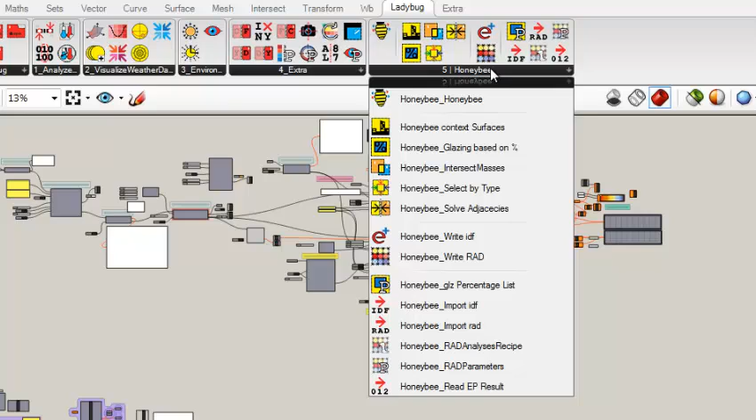Honeybee is a plugin for energy and daylighting simulation, like advanced simulations using Energy Plus and Radiance. It has multiple components, similar to Ladybug, which is the main classes, and then components for preparing the geometry, two components for running the analysis, and some components for reading the result back in visualization.

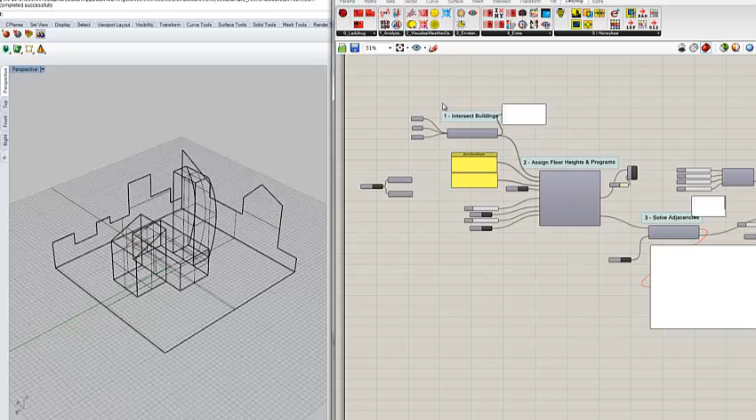I will just walk you through the different steps. The reason I'm capturing this video is that right now few people know about the project. I talk to them and get some feedback, wishes, and comments, and I think now is the time to get more ideas involved.

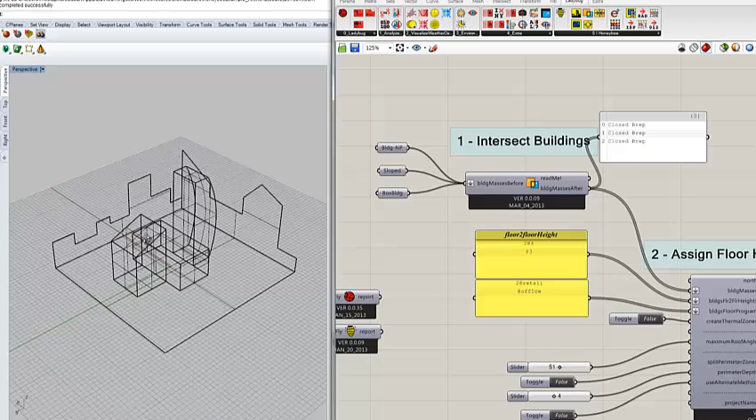Okay, so for this example, I selected three buildings here. This is a non-planar building, the sloped one, and the building box in the center. And then I have the site here, which I will add to the simulations.

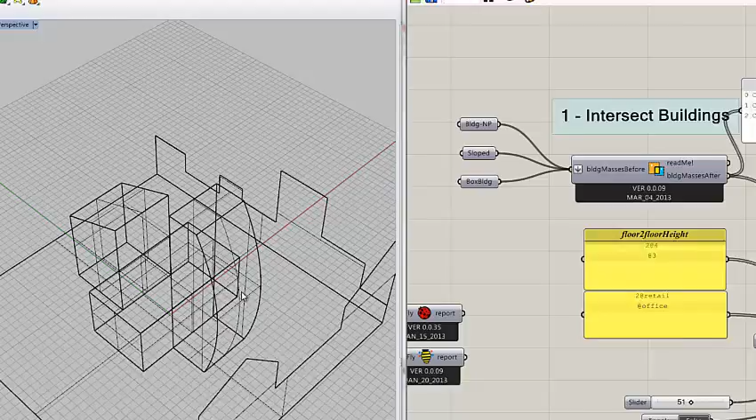I selected one of the buildings to be non-planar to show the abilities of Honeybee in handling non-planar surfaces. I already know it will add to the time of running energy simulation, especially, and a little bit for daylighting, but I think it doesn't matter. I'll just fast forward that part.

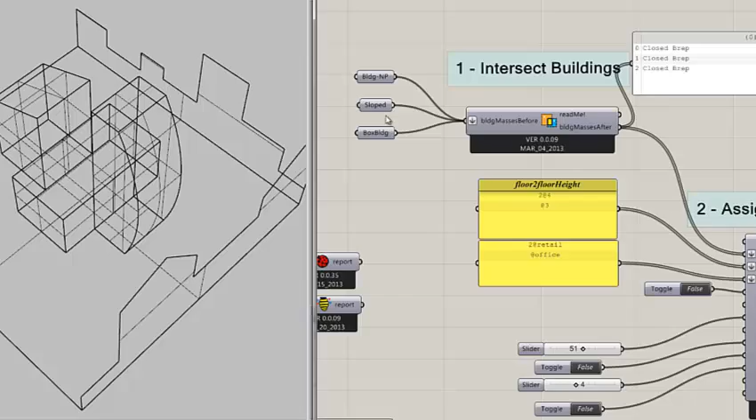So the first step is, you have your buildings, you just connect them to the intersection component, so it intersects the buildings, finds the surfaces which are shared and intersects the buildings based on that.

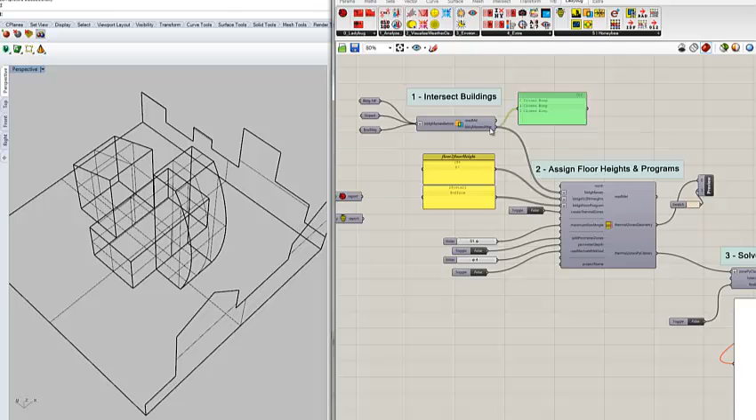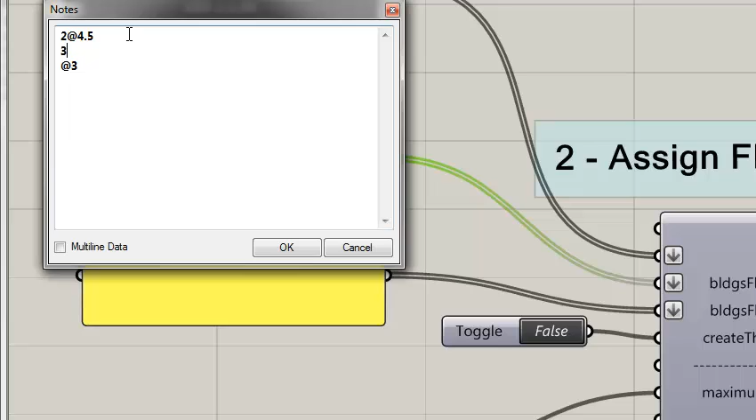Then you use the result of this component here, you start making your floors. So I say the first two floors, for example, are 4.5 and the rest is 3. You can say the next three floors are 6 and the rest is something like 3.5. But let's keep it like this because these buildings are not that tall.

At the same time, with the same language here, you can say the first two floors are retail, rest is office or whatever, and it will assign schedule and construction set.

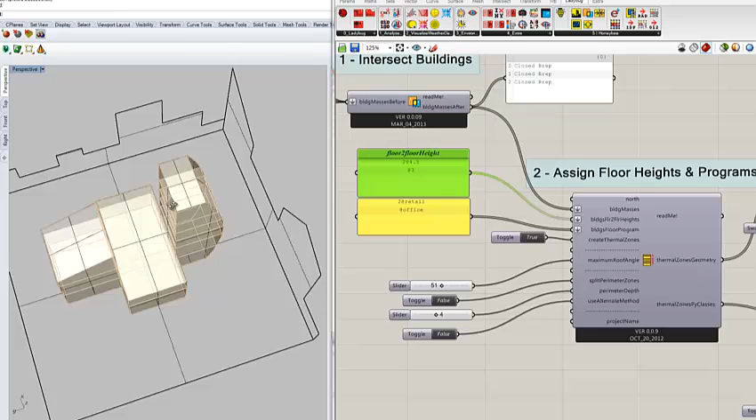And here I have more for splitting zones into perimeter zones. It hasn't been developed fully. It should work for a geometry like this, but I'm not going to try it right now.

So when I get this, there is another component that finds the adjacencies, like which wall is next to which wall. As you see, these are not only geometry afterward - they have attributes, so they have a name, a construction set, and a zone that they're related to.

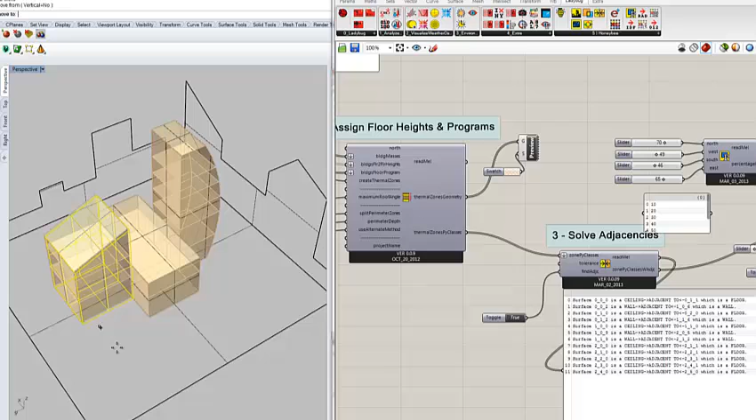And now, as soon as I start moving this here, it will update everything and the adjacency. So okay, so far so good.

So we get this. Now this is the right time to add the openings. I have this component here for now that adds the opening based on the percentage and the orientation. Of course, there will be cases where you have a geometry with everything assigned.

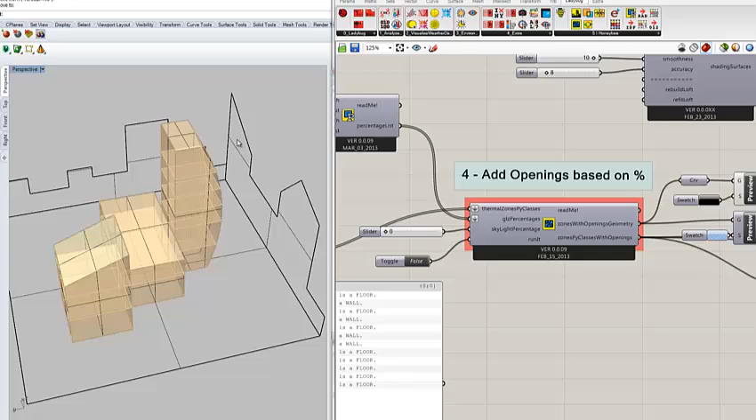There will be another component that you can use to make a thermal zone - or actually I'm using these zones for daylighting simulation too, so maybe I should call it a space, similar to what the OpenStudio team calls their zones. So this is spaces. There will be another component that lets you make the spaces out of a geometry that you designed, in any way that you want.

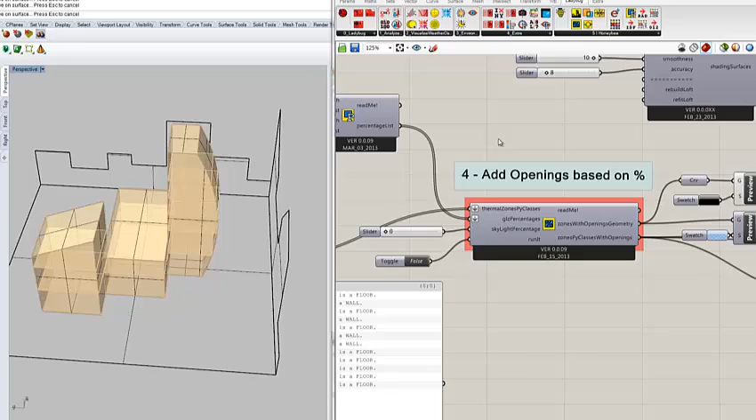So let it run. The reason it takes a little bit is because I have this non-planar surface and I have to use offset curve on surface to find the percentages that I want by guess and check. The other ones are going to be mathematical calculations, so they're pretty fast.

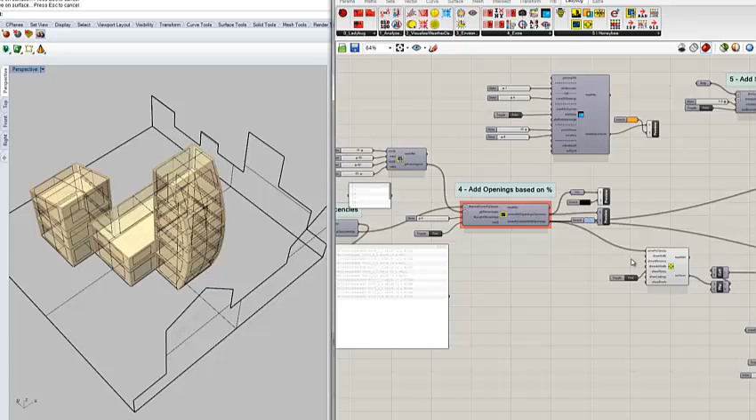Okay, got it. Now it's ready to run actually, but before that, here I'm adding this geometry as a shading, or context. I call it shading because this is the terminology in EnergyPlus - you add them as shading surfaces.

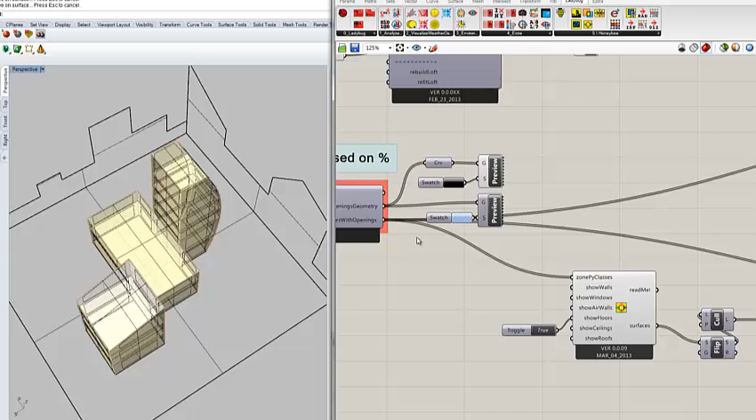So I connect this to here, I connect this one to here, so I have them, and it's ready.

So I just say where the location is, the weather file, and what are the outputs that I want. Working directory, this kind of thing, and then I can just write the IDF and run it.

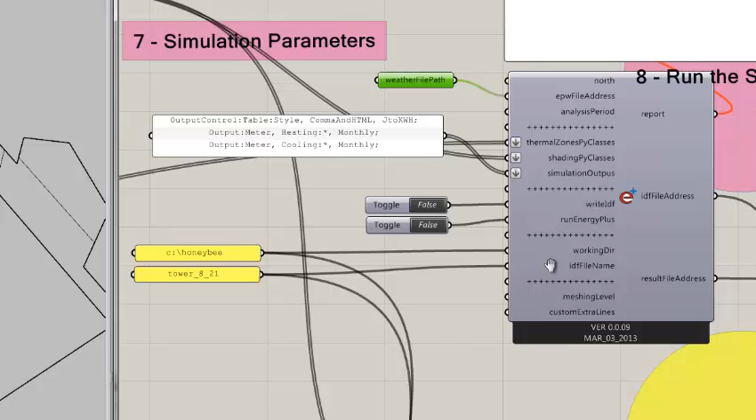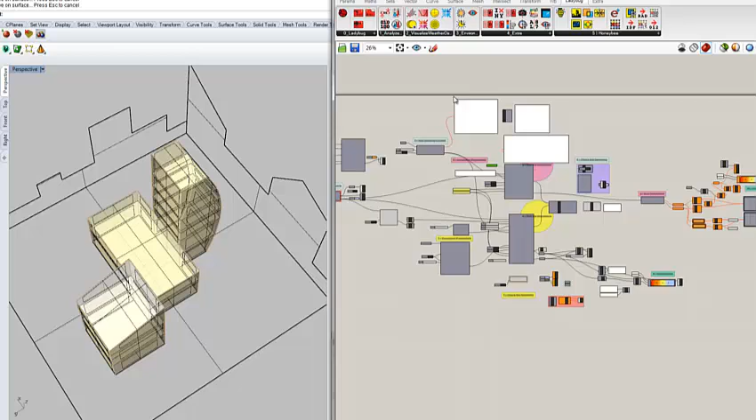But before that, let me talk a little bit about this custom extra line. I add this custom extra line here because EnergyPlus has - I don't know how many - inputs that you can change as variables. If you want to make parameters something like this, or something like what I have for Ladybug, so you can manipulate all that data, then it's going to be something like coming starting from here, ending here, I think.

And if you're not an advanced user, probably you're not going to change many of them. So this part lets you override the classes that you want to override if you're an advanced user and you want to make a change.

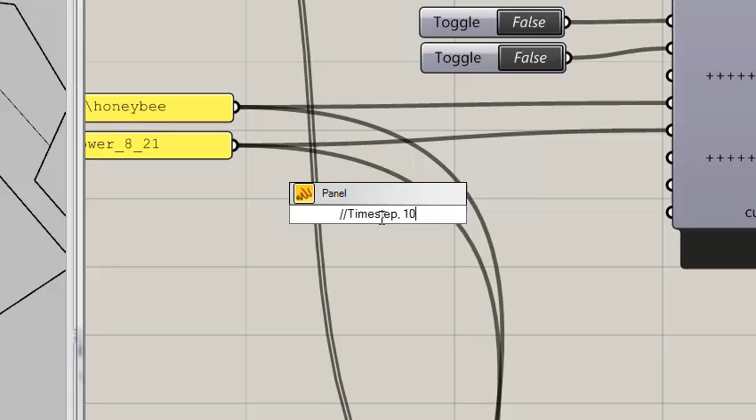A simple example could be the time step of the simulation. So I can write time step and like 10. It is 6 by default, then I connect it here, so the component will understand it and read it. Time step is here as an input, so it overwrites the time step that is already there.

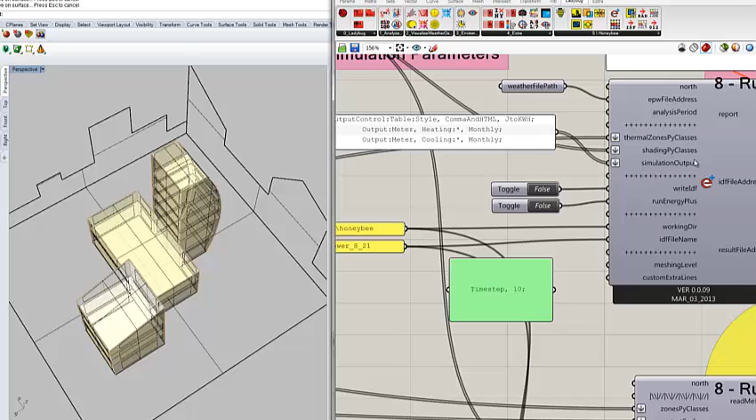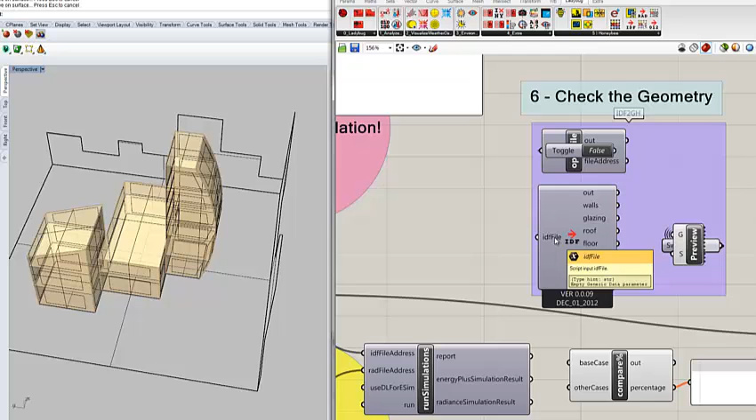So let me write the IDF file. Here you go, done. And before I run it, there is a component here that you can check the geometry. It basically takes the IDF file and visualizes it inside Grasshopper. It could be any IDF file, including the one I just wrote.

Let me turn off the preview. And the floors are here. The reason I'm doing this is before running the simulation, you want to make sure you have the right geometry. You don't want to run it and then be surprised.

I think the process of having a program that goes both ways, like from Rhino to energy simulation tools or daylighting, and from those tools bringing back to Rhino and Grasshopper, is important.

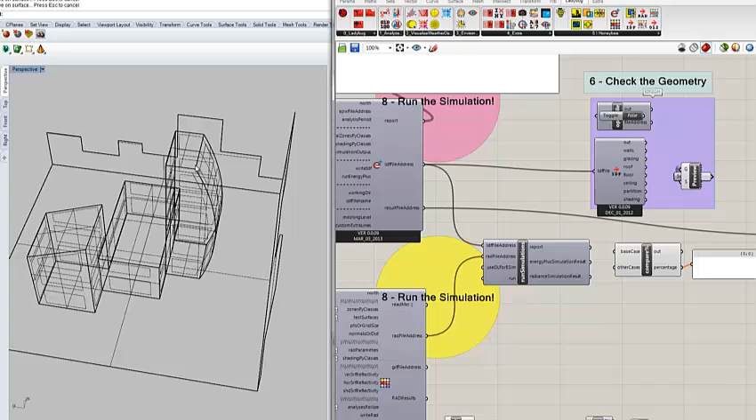Again, it takes a while because you will see the mesh on this surface. Okay, here you go. I connected them to different colors, so they're colored based on the type. The walls are yellowish, yellow-green is roof, and then you have glasses, so you see what's happening.

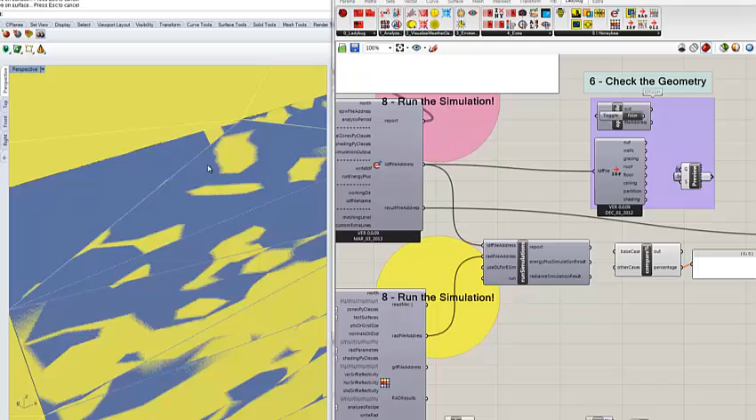These surfaces are all meshed, and if I zoom in, it's actually meshed and offset because all the windows should be a child in EnergyPlus. This is the only surface which is meshed; all the others are clean because there's no need to be meshed. However, it's a closed brep still.

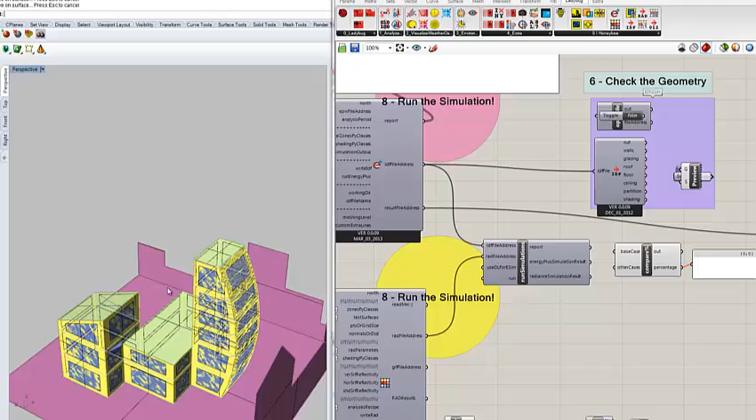So I've worked on different ways of meshing the geometries, cleaning them up, preparing it. I think what I'm doing right now is pretty sophisticated in taking geometries and simplifying them this way. Okay, I have it. It looks good, I can't see a problem with the geometry.

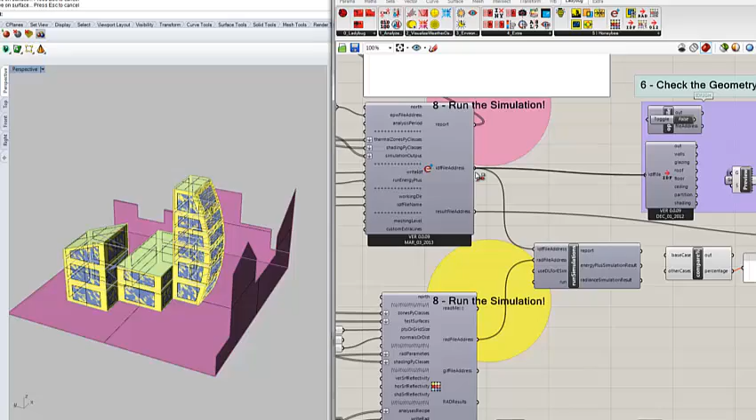Here is something interesting, we should see how long the simulation is going to take. Probably if it takes long, I will just fast forward before I upload the video. So done, run.

As you see, this is EnergyPlus. This is actually a batch file running EnergyPlus, so it's warming up. Oh, and analysis period, I left it empty, so it will run for all the year.

Well, it is slow, but not as slow.

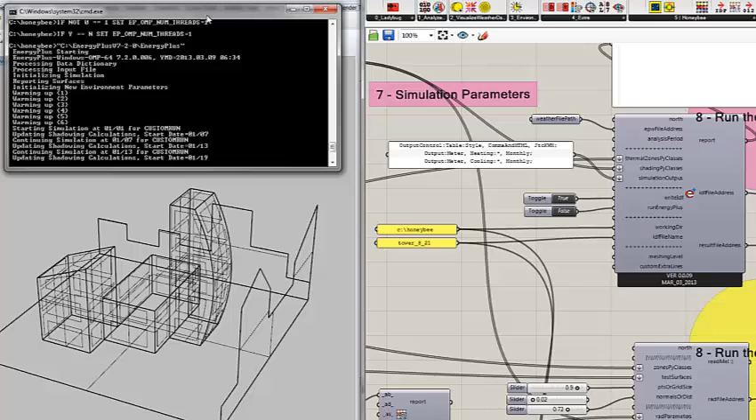I think I will fast forward this part and then show you how you can visualize the result.

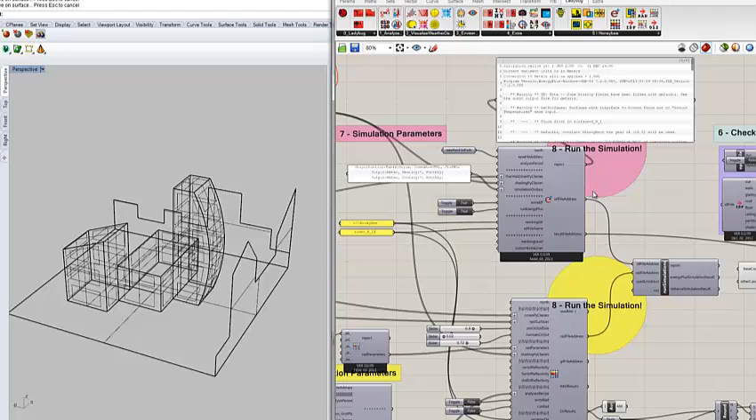Okay, the result is here. The simulation is done. This is the error file or report file, the first file you always want to read. I have 19 warnings, which is okay, and one severe error. Stop that, let's see what the error is.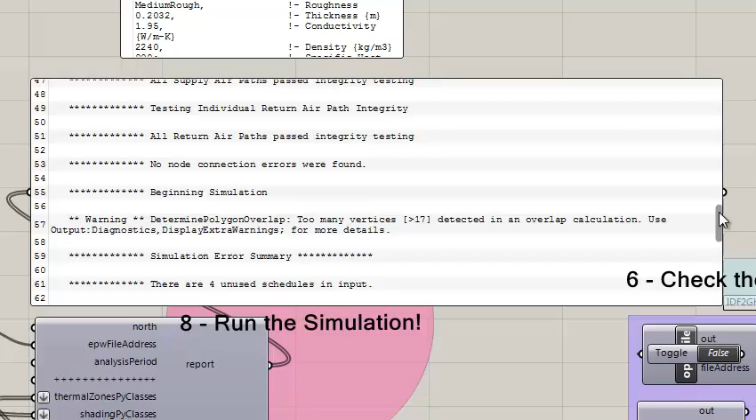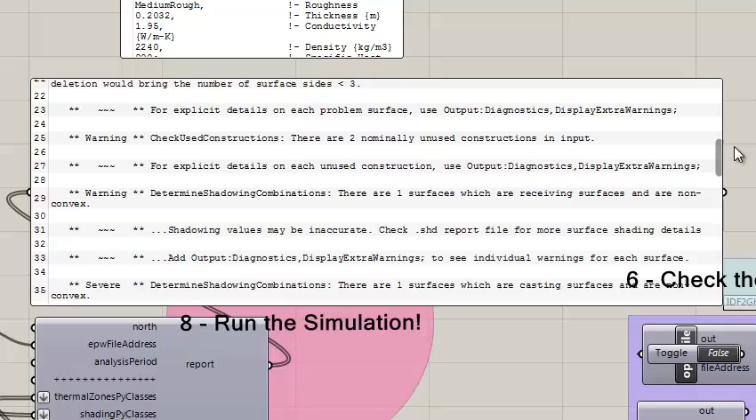It says these vertices are duplicate, they will be removed. Okay, it talks about the shared wall, which is okay because in my library I have only one type of wall, and it's not mirrored, but because the U value is the same, it will just continue the simulation.

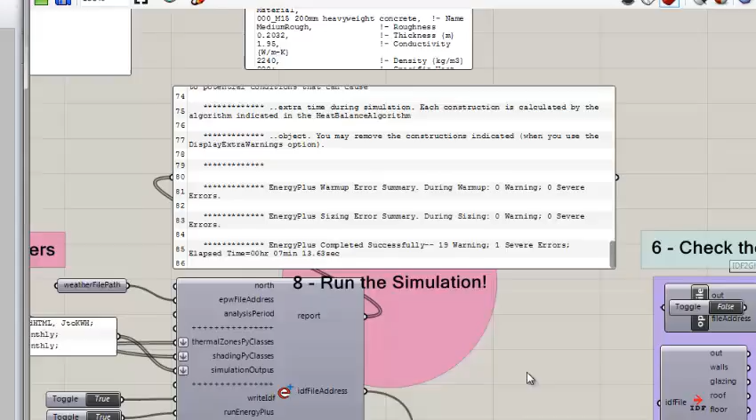If you want, you can add, as you see, you can check more, but for now I just want to show how it works.

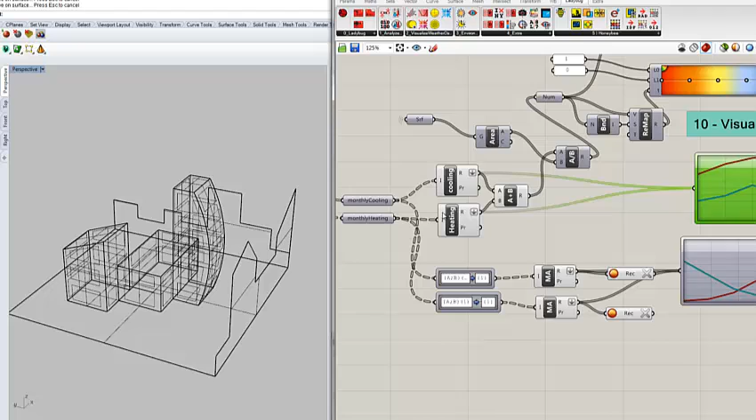So I have a component that reads the results from the address, and as you see, this is the heating load and this is the cooling load of these buildings, all together. And here you can get it for each zone, monthly cooling, monthly heating.

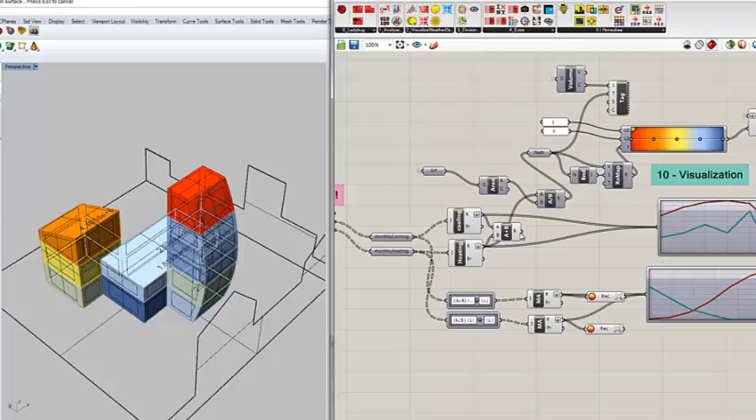So I can use these values and color the zones, right? And then I can see how much each one is going to use. For now I'm doing total per square meter, cooling per square meter, heating per square meter, or just total energy use.

And you see these buildings, because my roof construction is not such a good one, the ones on top are using the most energy. Well, per square meter is a better way to compare.

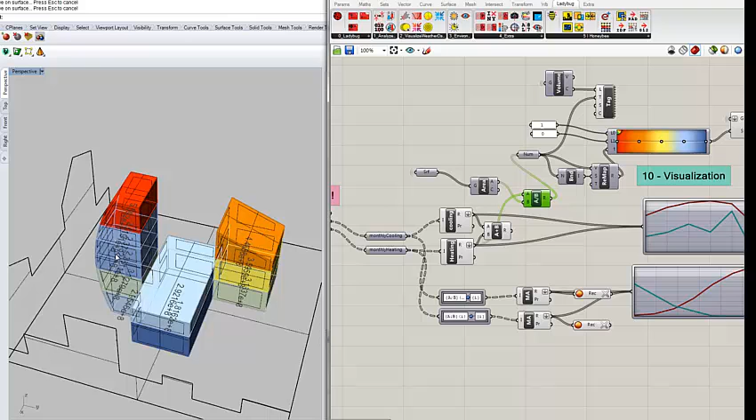In the building, in each building, so here's basically what you can do with energy simulation. You can get the loads.

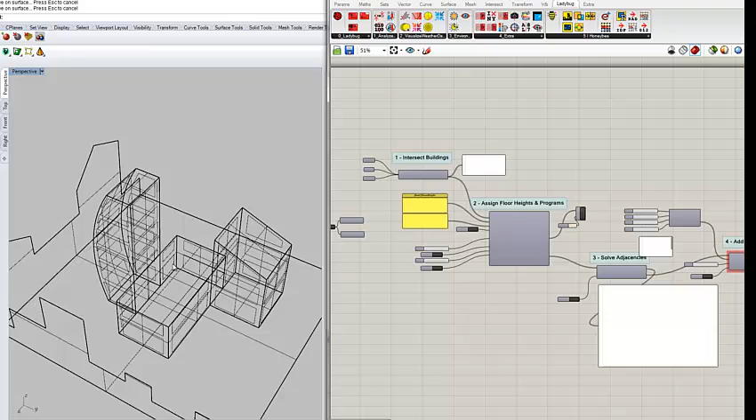Now I can do a fast change, for example, change the percentage of glazing on the west and see the effect—boom, it will redo everything. You can just make something smaller or bigger, but because we have this non-planar thing, I'm not going to do that.

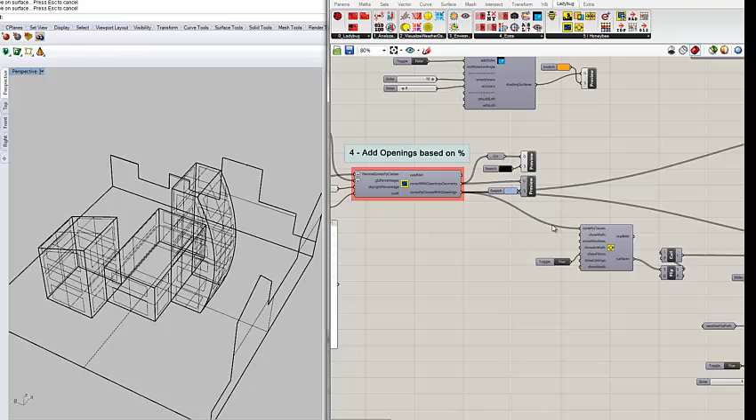It takes a while for running the simulation again. So this is the energy part, but I think an interesting part of Honeybee is you can run daylighting simulation for the exact geometry with no change. So I have this geometry from here. Instead of going that way, I should go this way.

There is a component here for running the daylighting simulation. For daylighting, you get kind of more input right now. Similar to energy simulation, it needs the geometries.

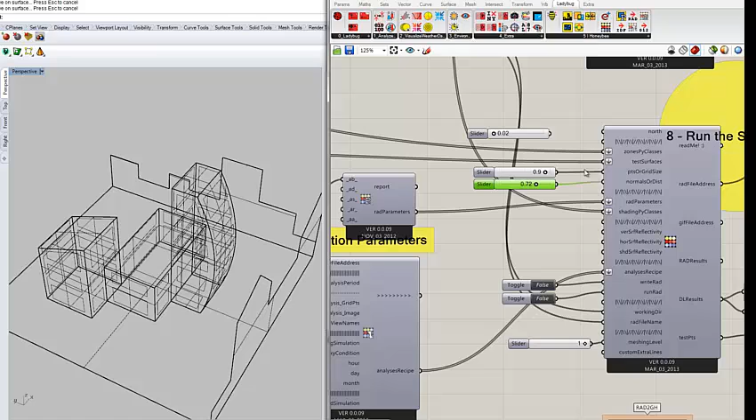It imports some test surfaces, and by test surfaces I mean from test surfaces you generate the grid, the test grid for running the simulation, similar to what you have in Ladybug. But there are small differences here—you get the option to use points and normals instead of a test surface, and grid size and distance. Either way it works.

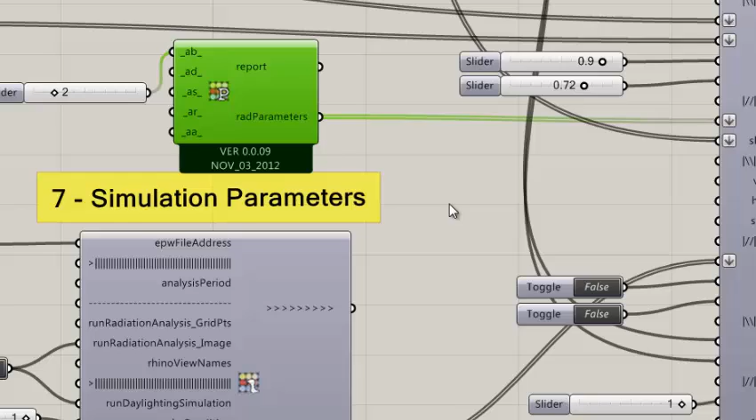Then you can import the radiance parameters. These are the advanced radiance parameters, like how many times do you want the bounce and all this stuff. If you just leave them, they have all default values. I put it to 2, so it'll be pretty fast—I mean fairly fast.

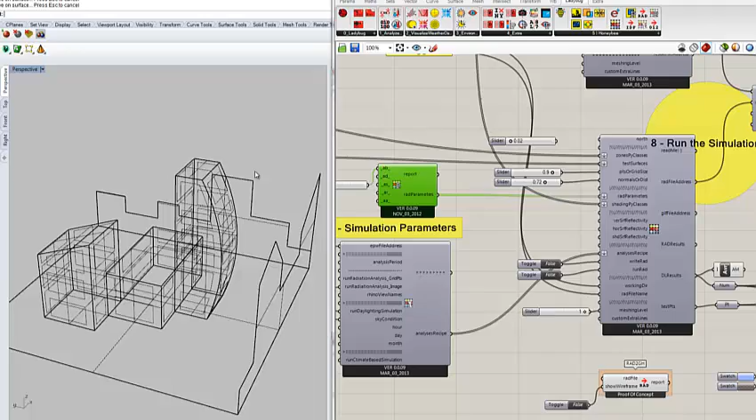And the shadings are added here from the same component. You can overwrite the reflectivity of vertical or horizontal—you should be able to overwrite the materials. But inside the components, what I do is I read the material of energy simulation and use them for the material of radiance actually. But you can always overwrite them if you want.

And there is an analysis recipe here where you say what kind of simulations you want to run at the same time, and I put it in a way that you can run this and that more than just running one now and then running the other study again.

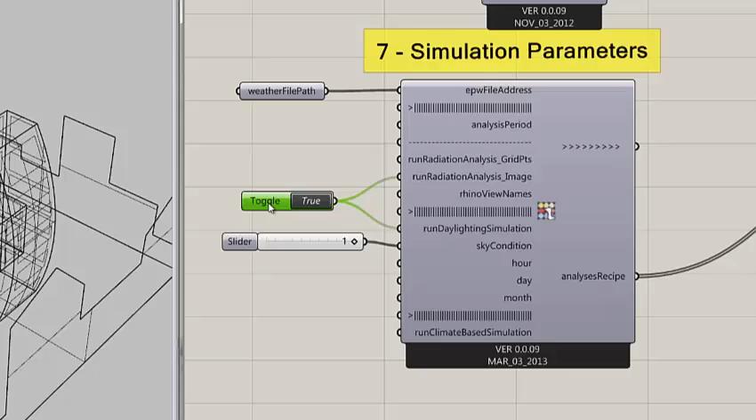So let's do this. I want to run an analysis for radiation. I want to get the image like in this view. You can add multiple views, Rhino views, and it will just run it for everything, but let's just do it for one for now. Let's look at this view.

Probably this is going to give us a good picture, and I want to run the daylighting simulation too, to see how much daylight I receive inside the building. You can say when—now it should be for 21st of December at 12 o'clock—and you can define what sky condition you want: uniform, cloudy, and so on. And there will be a climate-based simulation here.

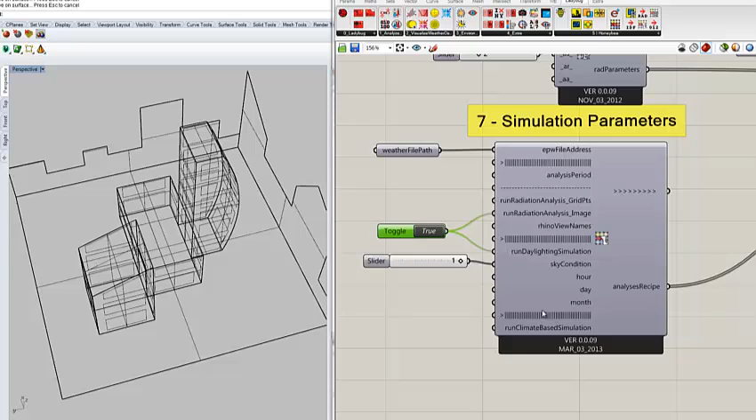I haven't made my decision on which way is the best way to go right now. I'm still thinking about it and talking with some people to see which way is most efficient, because this one is going to be fairly long when you run the analysis.

So we are ready. We only need to know the test surfaces for the daylighting simulation. So I can use this component which selects, with filters, the surfaces based on type. If I turn on the preview, I can see the floors, right? Show floors—these are the floors.

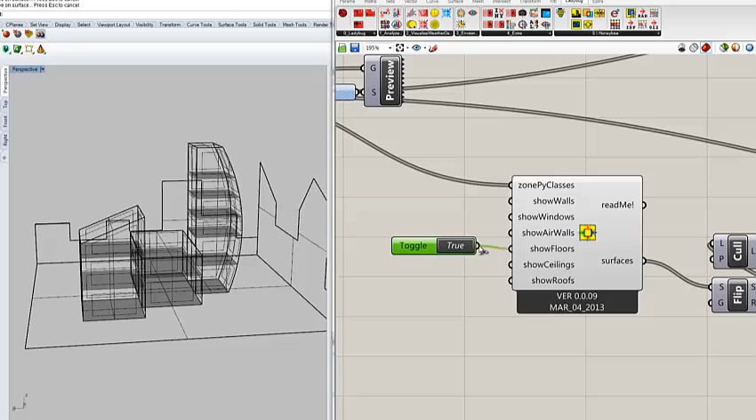Or I can run the simulation on the walls if I think the walls are the test surfaces that I want. For now, as I said, I want to use the floors because I want to see the daylighting, and I'll use half of the surfaces because I don't want to wait here forever.

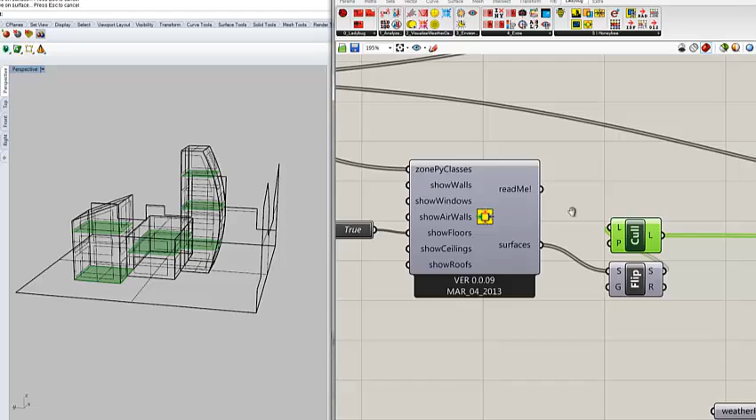Right? Looks good. And I use these surfaces, connect them as test surfaces, and let's set a grid of 1 meter and a distance of 72 centimeters from the floor. It should be how many feet? 2.5 feet, something, hopefully.

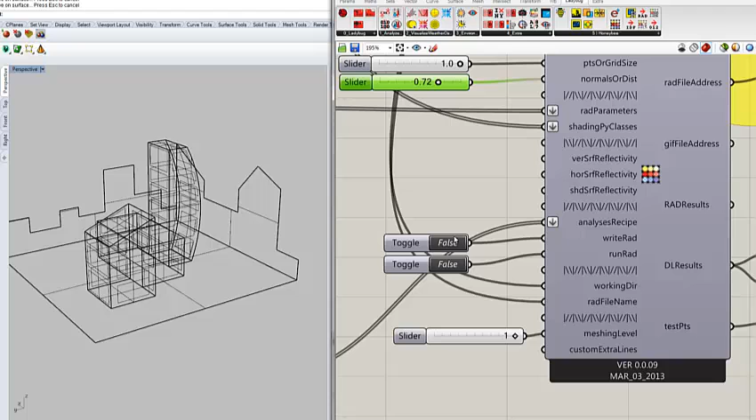So again, similar to what we had, I write the RAD file first before running anything. I check my points—okay, fairly dense grid. That's good. And then I can connect the RAD file address and see if it's exported in the right way.

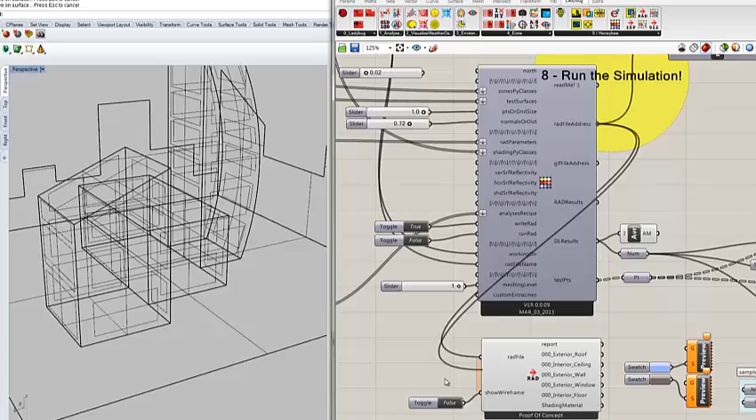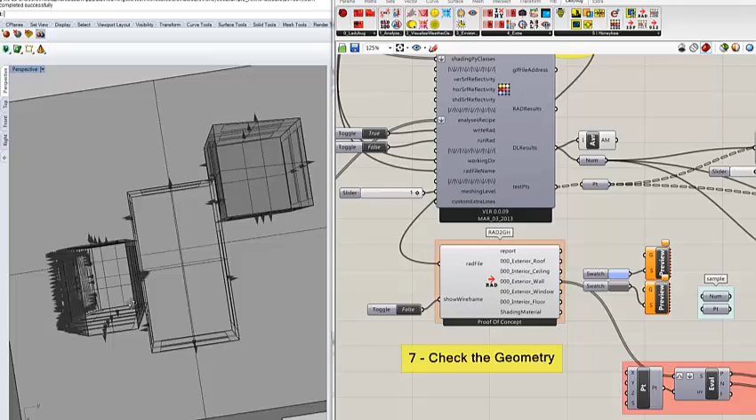I have an option here where you can either only see the wireframes, or now it gives you the surfaces, the real surfaces. So I can, for example, check the normal of the surfaces to be right. Let's check the normal of the walls. Yes, looks good—everything in the right direction.

And again, you see only this one is meshed and the other ones are clean. Let me probably disconnect and connect—so it's just removing all the outputs one by one.

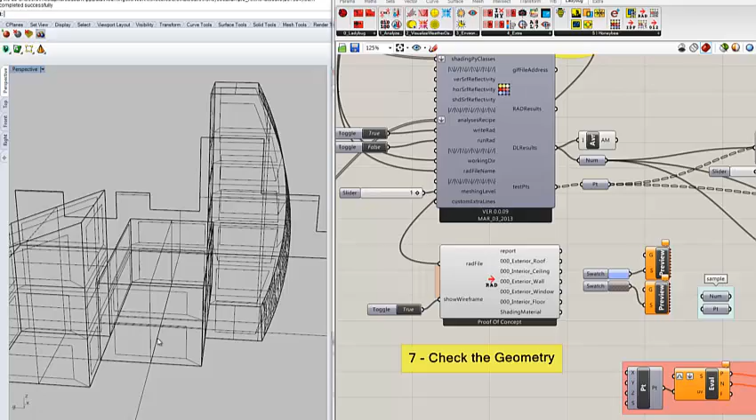There are limitations in the Python component to control, and I don't have a full understanding of how the component works, but it works for now. You see how it's written as a polyline, different from how you write it in Radiance. So it's actually a polyline going like this, and then you have a surface inside.

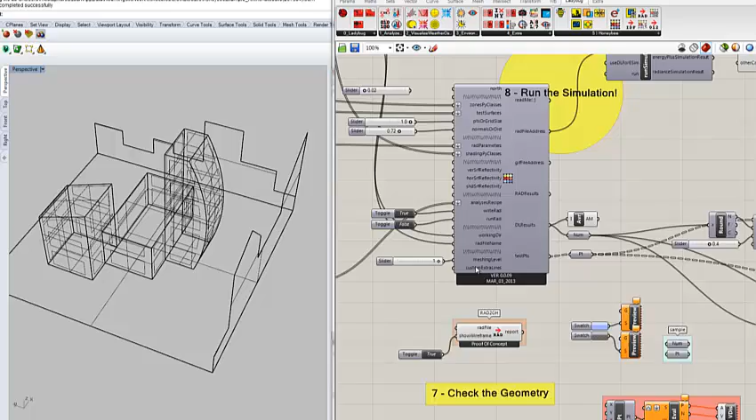Everything looks good, so I can run the simulation. Again, I set the right view that I want. You can set up a view and just connect the name here. Okay, go.

So now it generates the sky for the radiation study first, and makes the scene that you want to run it, and now it's running the rpict, which generates the picture.

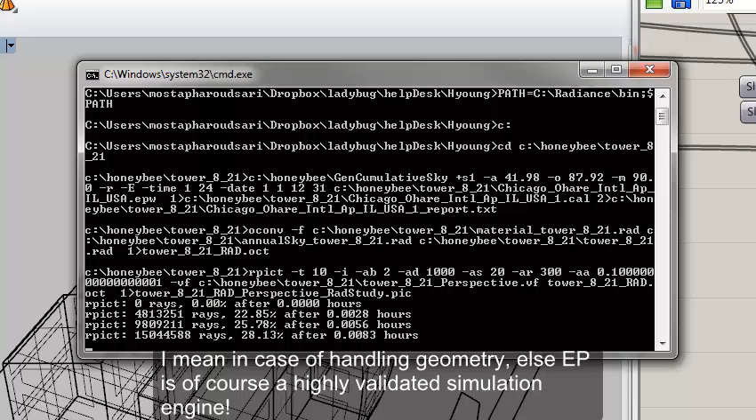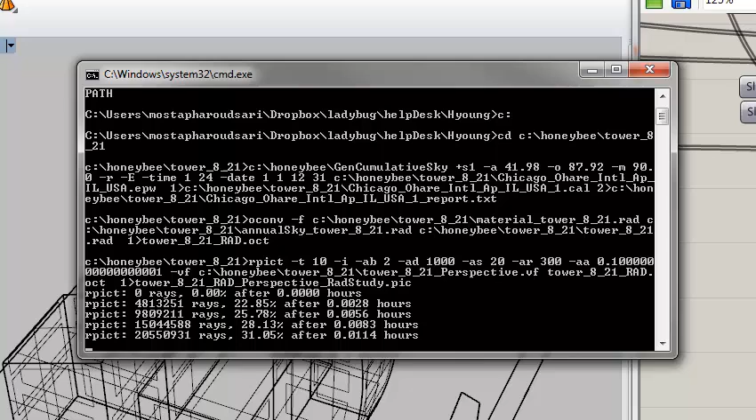Radiance is a validated simulation engine. It's not like Energy Plus, it's more geometry friendly. It basically accepts all the surfaces as mesh surfaces having properties and materials, and it runs the ray tracing. It has a really good supporting group, a really active forum, nice people. I really recommend it, because energy simulation is something designers take a while to get used to, but daylighting simulation is fairly easy to start and understand, and you will get really good support if you have any question.

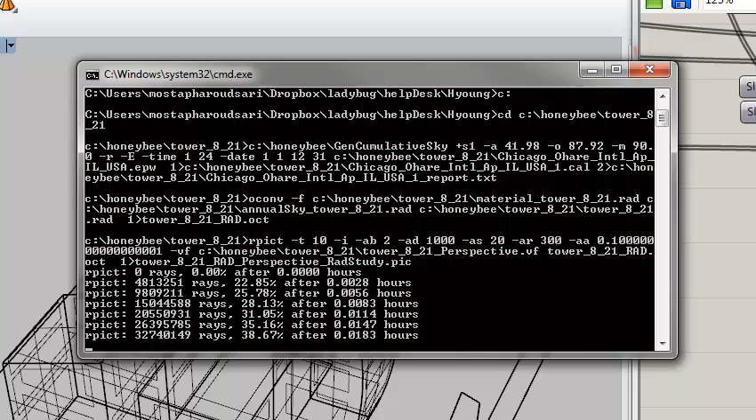In any case, 41%. Probably I have to fast forward this too.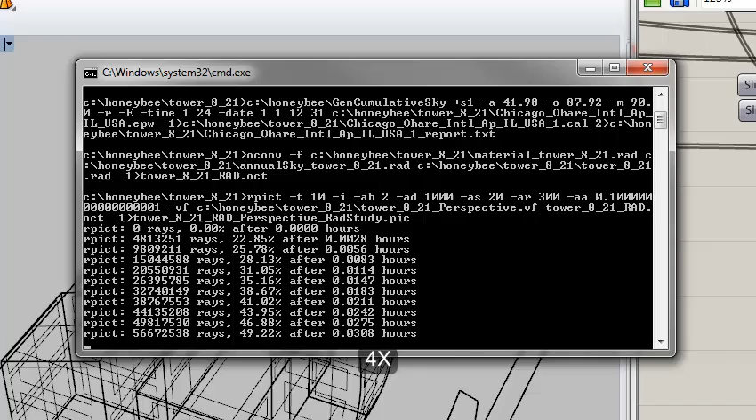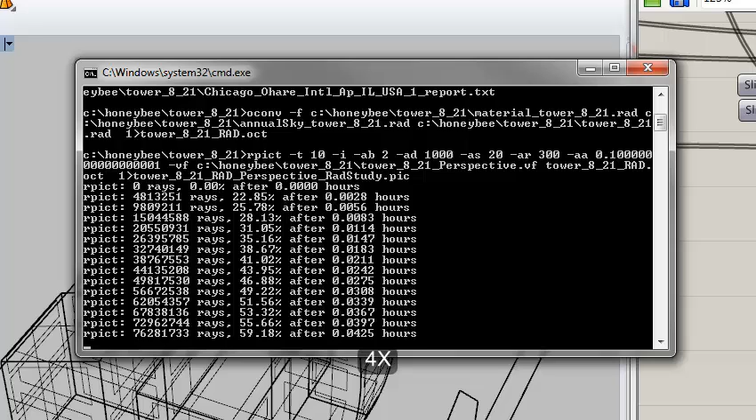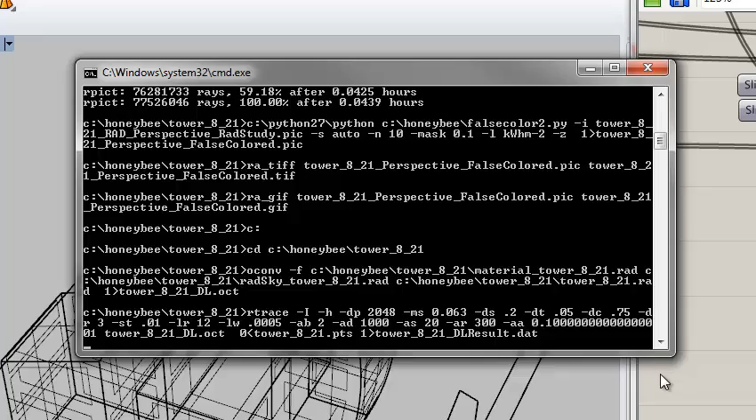Okay, it did it. It converted it to a TIFF file and a GIF file from the pic. Now this one is ray tracing, and it makes the sky for the daylighting simulation based on the inputs that we have for December. It was December 21st at noon for a cloudy sky, and it's running the daylighting simulation for that time. Done.

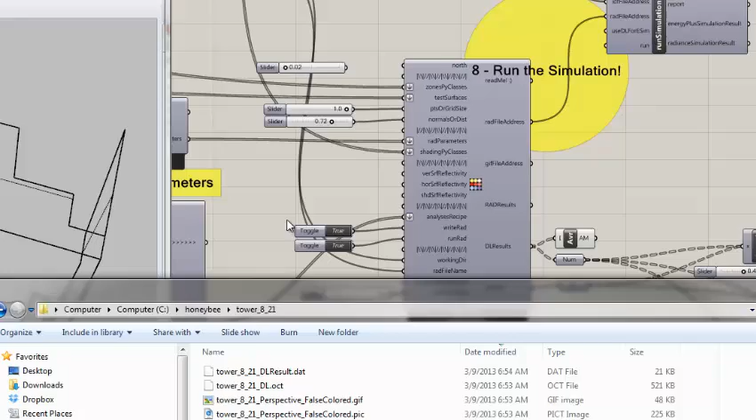So we got it. For the picture, I should go to the folder. C, backslash Honeybee Tower 8_21 — it's Tower 821 because I named it this. Why I named it this, I don't remember. But anyways, here is the GIF file, the same as you see, the same camera, the same view.

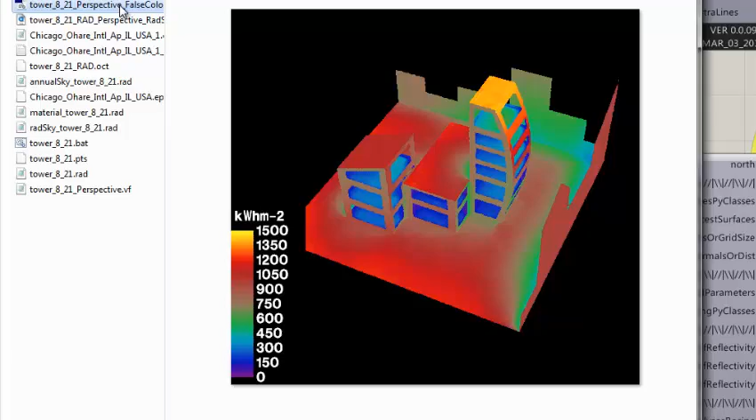Wow, excuse me. Oh, if I can drag it. Okay, and then there's a TIFF file, which is high resolution if you want to use it for a presentation or something.

And the address of the GIF file will come here as an output. I wish there was an image sampler in Grasshopper that could accept the address from here, so you could see it, but there is nothing like that, or I don't know about it right now.

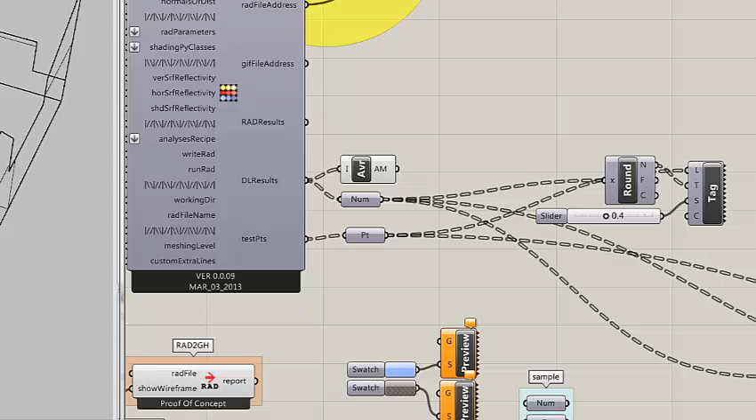And then you can do so much, like you can import the radiation results in a view, and use that picture as an attractor for the values of the colors, because the colors represent the amount of radiation that you get. So, for example, you can do it for the top view and then design a site plan based on that. It's much faster, sort of, and it gives you lots of opportunities.

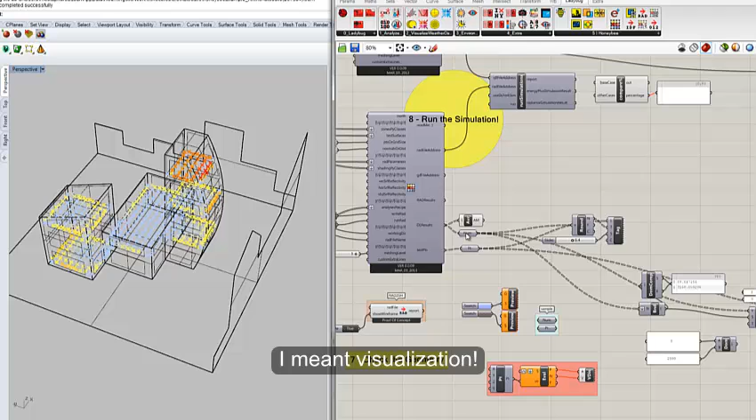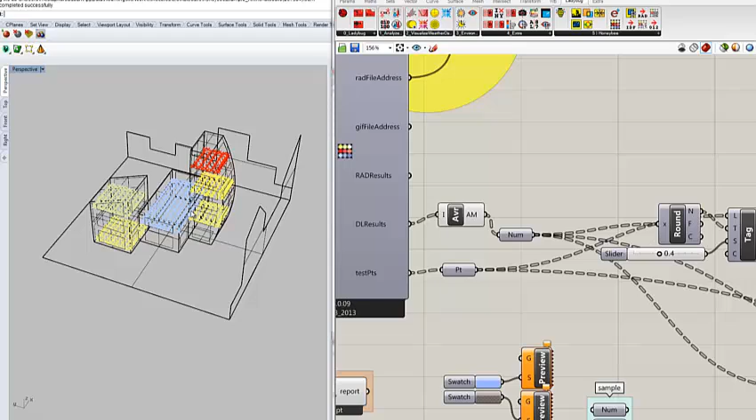I will definitely integrate these visualizations inside the components, similar to what Ladybug does now, but there are a few differences. For example, now I graph the data, so not only can you see the result for each point, but you can see the result for each floor, like the average value. So if you design, for example, a neighborhood, you can see, oh, here's where the problem is happening. And definitely you should look to the numbers, not to the colors.

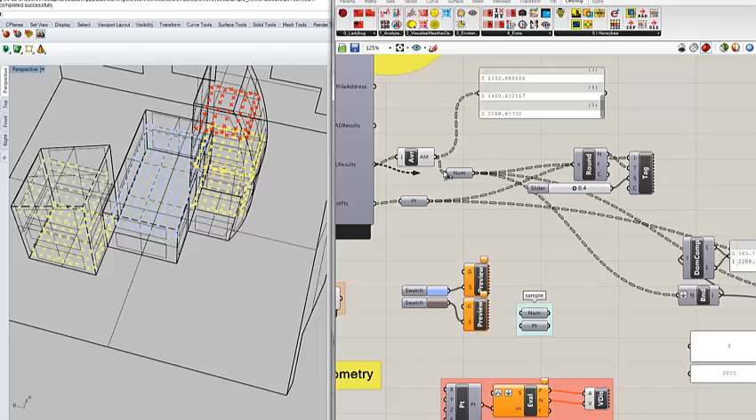So what is the minimum value that I got? Well, the average is high actually. And what is the minimum value — before, 69. Not that good. So, as you can guess, you can see the values here.

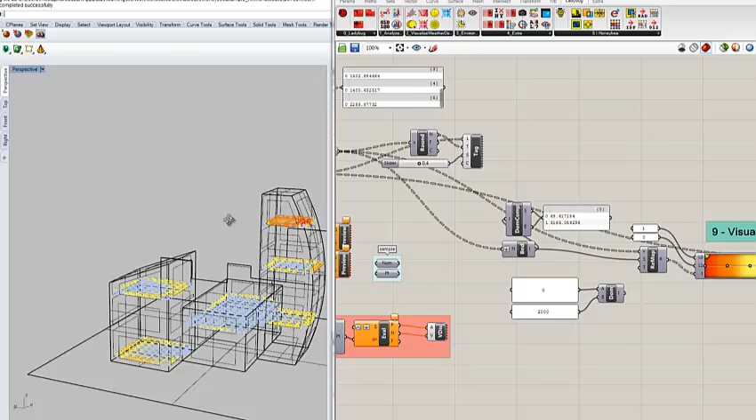So you can use all the inbuilt native Grasshopper components to dispatch the data, so you can find where that 69 is happening and make your design decisions, change it, go to the next level. And the reason this is getting so high is because when I move the points up, probably some of this could be out and getting a crazy amount of daylight.

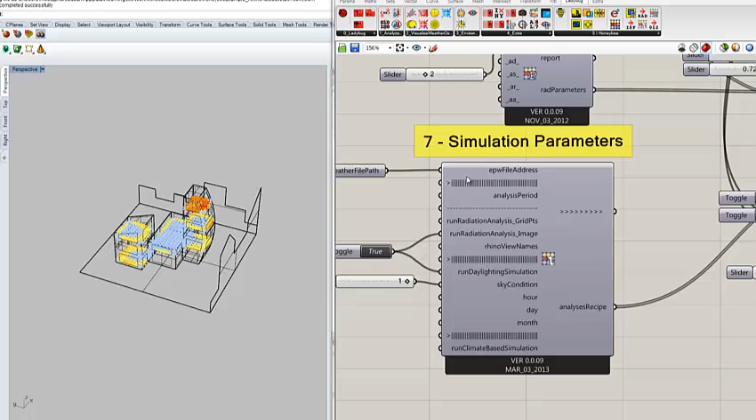Well, I think that's it for now. I can run radiation analysis, but it's going to be similar, exactly similar to what's happening now in Ladybug, but much more accurate.